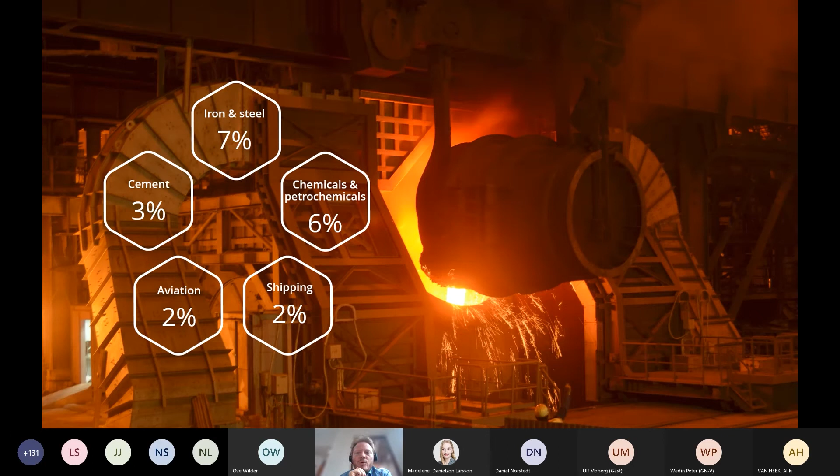So we really believe that where Topsoe can play a role and where electrolysis and hydrogen and downstream products is critical is in the hard to abate sectors. So these are sectors such as iron and steel, chemicals and petrochemicals, shipping, aviation, cement. These are sectors that are very difficult to directly electrify. It's a little bit back to the first speaker of the day, where in some of these cases you need very high temperatures. In other cases, you need fuels with high energy density.

If one looks at a schematic here on what needs to happen, what Topsoe traditionally has been doing and what we're also doing today is that on the left you see feedstocks, then you have some sort of conversion technologies, and then you have the way you use them out on the right. What we do today and have done historically is to take fossil resources and convert them into various products that modern society needs, that being fuels and chemicals. And what is happening now is that there's a much increased need to couple both biomass and waste to these end products and electricity to these end products. And what I'll focus on today is the coupling of electricity to

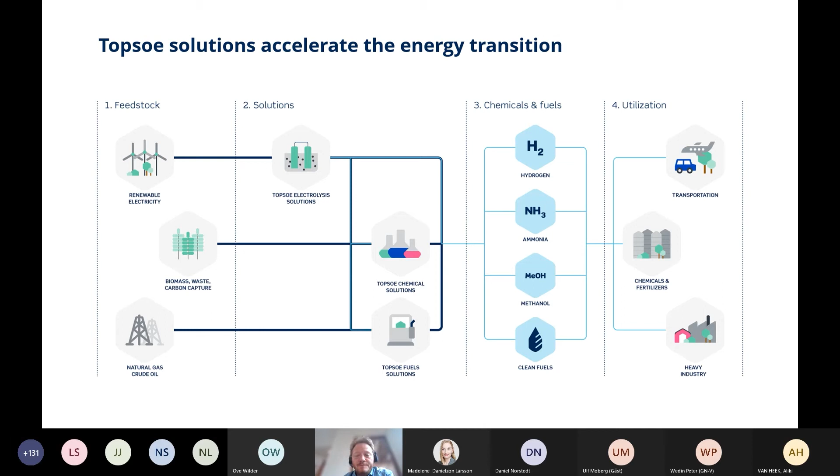So a little bit about electrolysis. The largest efficiency losses when you go from electricity to end products lie in the water electrolysis process itself. That is the process with the lowest efficiencies, and this is an illustration where you can see the energy consumption on the left, when you go from methane to ammonia. Ammonia is just an example here, and you would see more or less the same with other products. The methane to ammonia process is extremely efficient, and you actually cannot beat it if you use low temperature electrolysis technology such as alkaline or PEM. You would end up using more energy, and the majority of it, as you can see here, is on the electrolyzer. The chemical synthesis loop itself doesn't really use much energy.

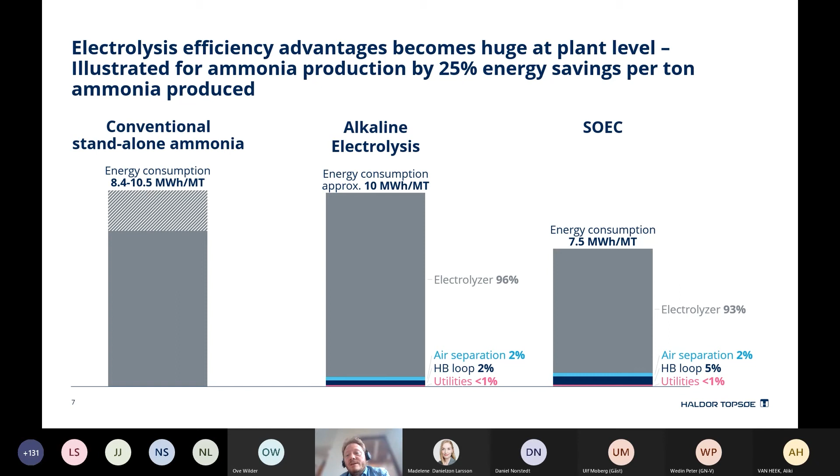And then if you shift from alkaline electrolysis to high temperature electrolysis, which is much more energy efficient, you end up with a 25% energy saving, which of course matters a lot, because one of the bottlenecks in the energy transition is the development of electricity sources required to substitute fossil resources, because we get an immense amount of energy from fossil resources today.

And what we have spent time on is optimizing the electrolysis together with the downstream processes to link with fluctuating wind, and it may be one of the benefits of nuclear that you do not have fluctuating production. You would actually prefer to run at stable production. But just to say that we are at a stage where you can accommodate these fluctuations you will see from renewable energy, in this case defined as wind and solar. You can accommodate that in the ammonia synthesis without a need for hydrogen storage.

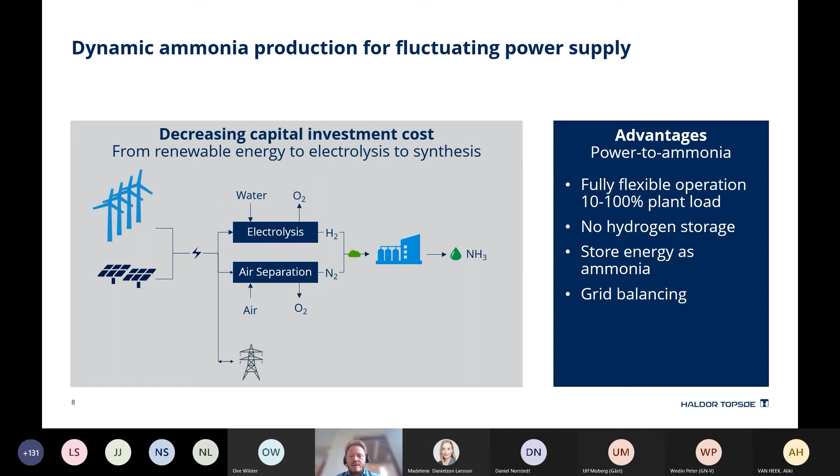So this means that the solutions to integrate with varying amounts of electricity, we are now in the stage where we'll have a 20 megawatt plant demonstrating this in Denmark, up and running in a few years. So this means that we really spend a lot of time on this, how to transform electricity into chemical products. And this is of course where the interesting topic lies, what is possible when you have nuclear.

And now I'm going to spend some time on high temperature electrolysis, because what you can do when you have high temperature electrolysis is that you can benefit from having a heat source to provide steam, and you cannot have this benefit if you do low temperature electrolysis. So you can do heat integration. So it means that you have two variables to play with when you integrate with nuclear. While if you had alkaline, if you had low temperature electrolysis, you can just use electricity. You have no use of the heat for the hydrogen generation itself.

So high temperature electrolysis, for those of you who do not know, this is the crash course. High temperature electrolysis is an electrolysis technology that uses a ceramic membrane that can conduct oxygen ions, and it can only conduct oxygen ions at high temperature. So you need to run these solutions at high temperature. The way we do it, it's between 700 and 800 degrees C. And that has some benefits, not only because the higher temperature gives you better kinetics, it also gives you some benefits in terms of efficiency due to some thermodynamic arguments.

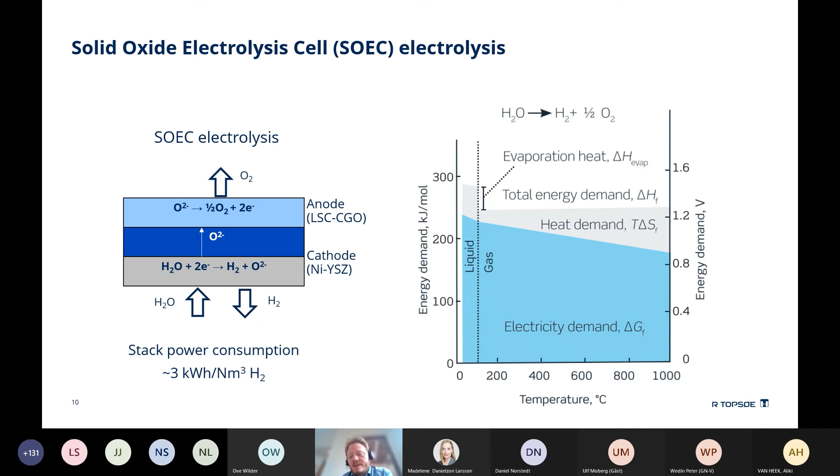So this is the main reason why you have very high efficiency. I mean 100%, that's as far as you can get, so you cannot get higher efficiency than this. And then of course in choice of electrolysis technologies, you have 3 different choices essentially. You have alkaline electrolysis, which is a very mature technology. It has actually been used to build very large industrial plants producing ammonia.

Then you have PEM electrolysis, which is another kind of membrane where you have very fast response, but again you lose efficiency. While then for high temperature electrolysis, you can have high current density. Depends on what you mean by high, but in terms of current densities, you lie in between alkaline and PEM, but you have high efficiency.

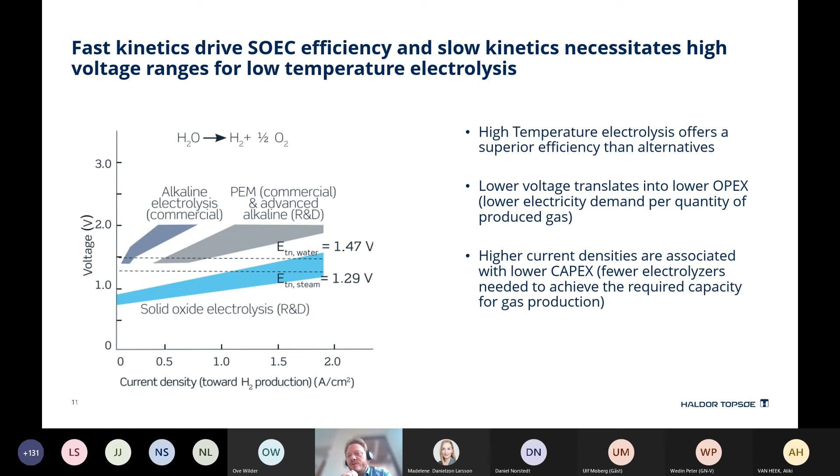So for these kind of applications in large-scale conversion of electricity into chemical products, efficiency will be critical. Efficiency is critical in the fossil industry, turning fossil resources into whatever product you need, and there's no reason not to believe that efficiency will also be critical in the future, where you have substituted fossil resources with electricity.

Let me just have a look at the time here. Okay.

So if you just want some numbers on efficiency, alkaline and PEM electrolysis have more or less the same efficiencies. They operate in different ways, but efficiency-wise, it's more or less the same. So you have some losses. This is kilowatt hours per normal cubic meter. So you have some losses in the plant, and then you have losses in the electrolyzer itself, and then you need to pay the heat of evaporation because you go from liquid water to a gaseous phase. So you need to pay that anyway. So that is added here.

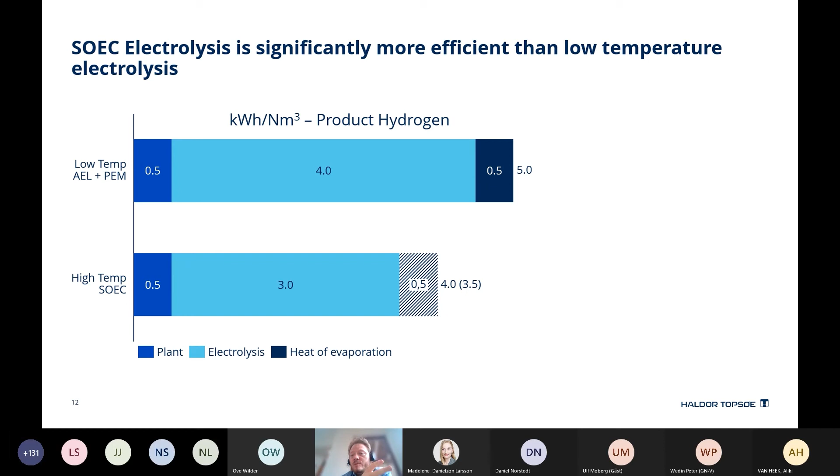When you have high temperature electrolysis, you still have losses in the plant. Then you have the stack efficiency, which is a thermodynamic limit, and then you also need to pay the heat of evaporation, but in this case, you actually do feed steam to the electrolyzer. And of course, this heat of evaporation, you can provide with electricity, but it can also come from processes either in front of the electrolyzer, so that could be a nuclear plant, or from conversion processes downstream.

And as I said already previously, in the last 10 years we have done demonstrations on integration of high temperature electrolysis with synthesis of methane, methanol, ammonia, so traditional chemicals that are produced in very large numbers and are needed for our modern society. You have these benefits of heat integration when you look at these different synthesis processes.

So it means when you think in terms of nuclear integration, it may not be that your product would be hydrogen. It may be more beneficial to have a product which could be ammonia, or a fuel or another chemical. It depends, of course, on where this nuclear plant is located and the local market. But not necessarily that you have to think in terms of hydrogen as the end product. I would say in our discussions with the various project developers and commercial entities, it's very much fuels and chemicals that are the needed end product and not hydrogen itself.

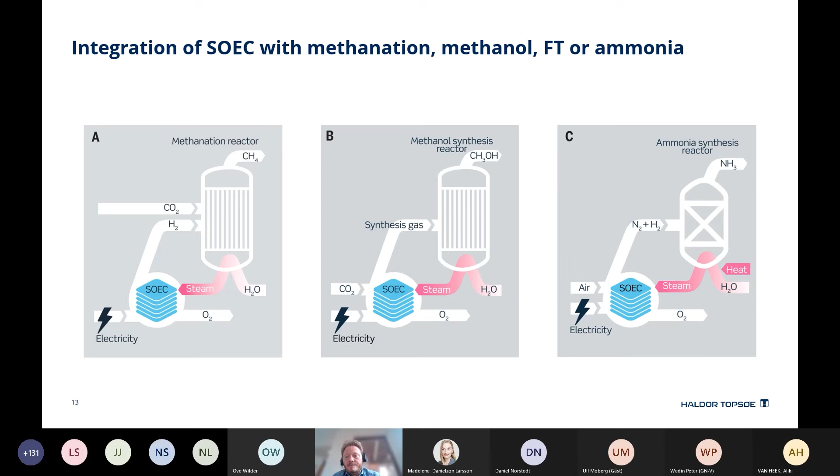So a little bit about where we are coming from. Topsoe had a daughter company where we tried to make fuel cells based on high temperature cells. That was not a success. Many other companies tried to do the same, but essentially got outcompeted by efficiency in gas turbines and of course by wind and solar. So we took this in 2013 and used it for applications in small scale chemicals where you take CO2 and you convert it into CO.

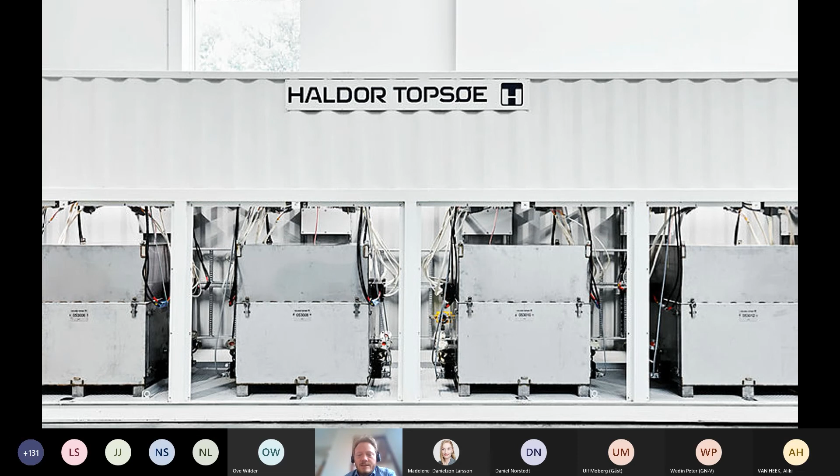This is the product for that market. The product that will be integrated with nuclear plants or with solar and wind will look completely different. You essentially scale this up. So each repeating unit, these boxes you see, will have an output that is more or less 10 times what we have in this product here for it to make sense. This is just to show that there's actually something that is materialized in the real world.

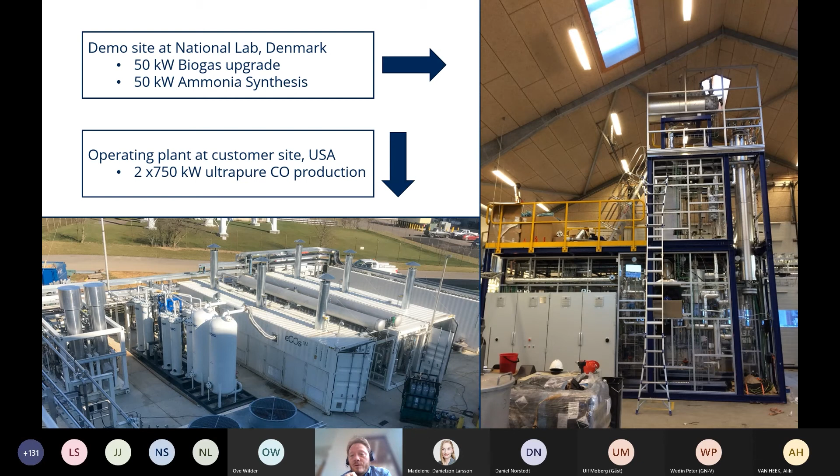So, with essentially more or less the same ideas as for the small modular reactors, you can manufacture these repeatable units and get the benefits of economies of scale, and that is key to bringing down the cost of electrolysis. So you have to think in terms of modular units that have, of course, different utilities, and which look like the chemical industry. It will feel like operating not exactly a nuclear plant, but the process control is similar to the chemical industry.

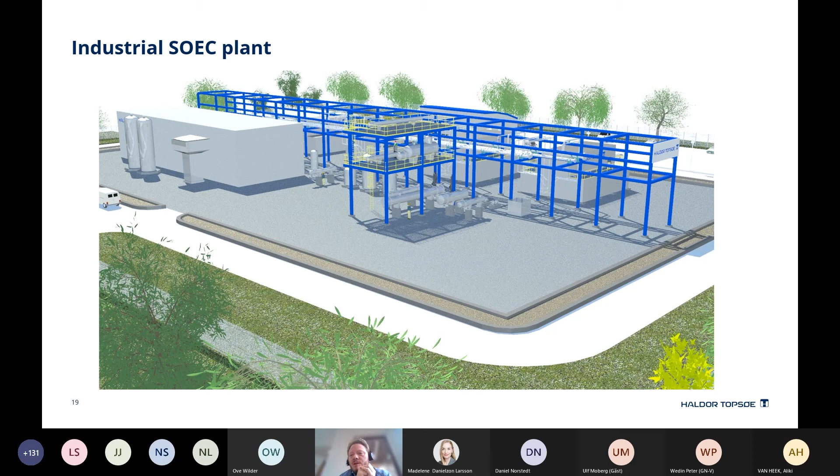And then I want to end on this slide here, because I think this is where there's some work to be done. So you can say the high efficiency from high temperature electrolysis comes from two things. It comes from the fact that the stack itself is highly efficient, and then the last gains come from the way you integrate high temperature electrolysis with the processes around.

But maybe the steam that you would have available from nuclear would be of higher grade, and you would not have value in using it for other uses. You would rather use it directly in your electrolyzer. In that case, it would require some engineering to find the optimal solution.

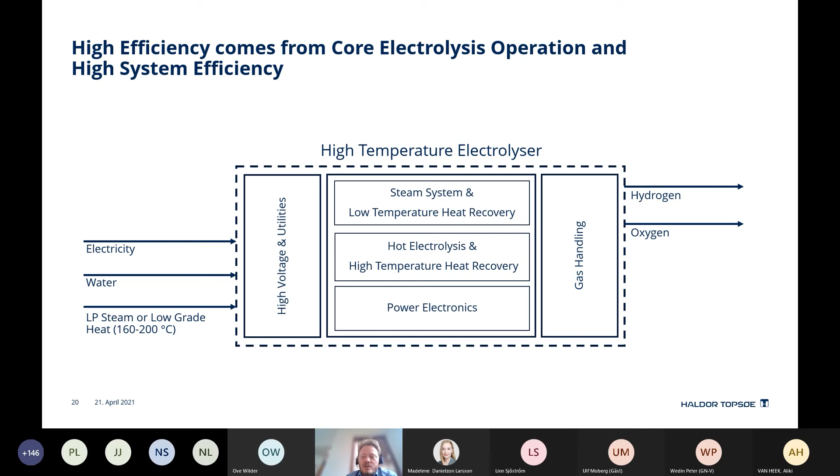So I will essentially stop here by saying that high temperature electrolysis has a lot of advantages which we believe fit very well with the nuclear industry and hard to abate sectors as such. Essentially, this fact that you have high efficiency and you have this benefit of integration both with downstream and upstream heat sources, which we believe makes it very suitable for integration with nuclear.

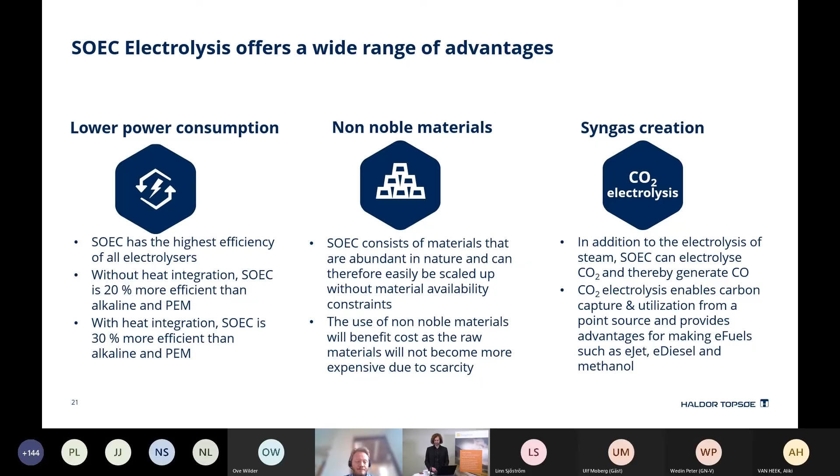So I'd like to maybe split my questions in two categories. First, starting with a more general view on hydrogen, taking the opportunity to have somebody like you who obviously knows the hydrogen landscape quite well, and then from there move to the specific application around high temperature and the integration of nuclear. So if we start with the hydrogen landscape and the progress around electrolysis, can you give us an idea how quickly that development is going right now and what we can expect in terms of cost and performance of electrolysis more generally?

Yes. I would say this area exploded in 2019. As for nuclear, it requires some government incentives to drive this industry, and those government incentives came in 2019. So you had the political winds change, especially in Europe, and then later maybe 2021, 2022 also in the US. And this means that if you look at the landscape of electrolysis companies, you have established players in all of these three technologies who are rapidly scaling up, establishing production capabilities in 500 megawatt plus sizes.

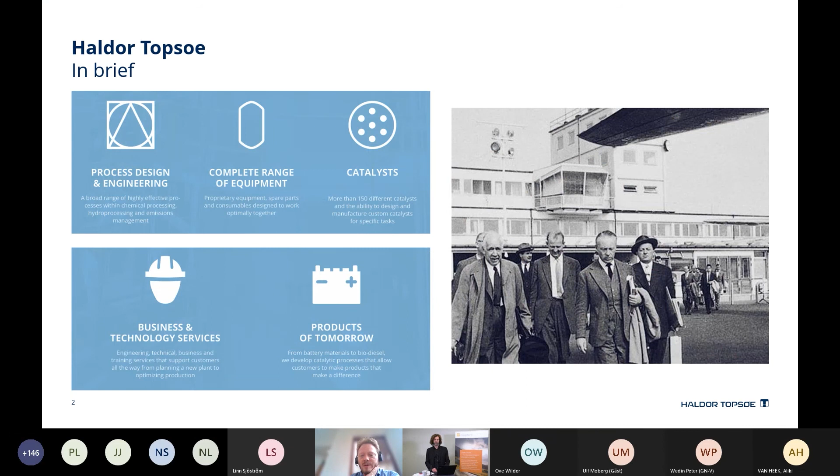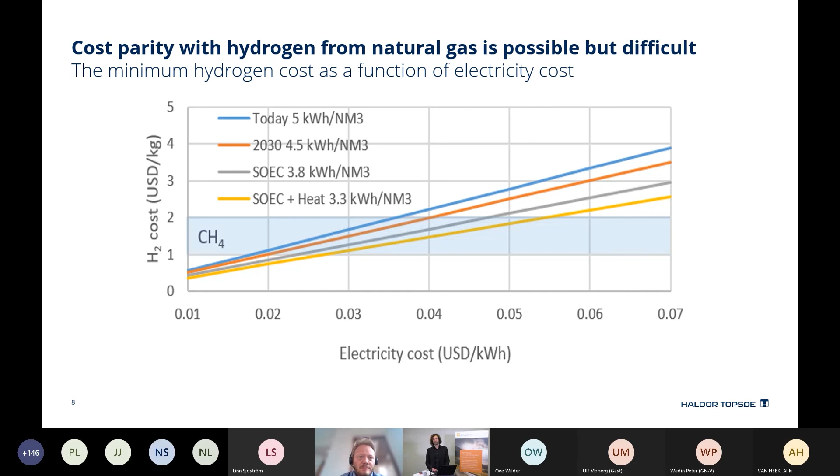Yes. But then moving on to the issue of high temperature electrolysis that you talked about. You mentioned quite a few benefits, including the higher efficiency and so forth. It seems obvious. Why is this not happening then? Yeah. So for two reasons, it's the least mature technology.

There was a lot of both R&D activities and also commercial activities in applying these solutions for fuel cells from 2000 to the next 10 years. So the technology matured in that area, but just 4 or 5 years ago, it was impossible to make a business case for making hydrogen. So that's why we focused on the CO2 to CO, where you actually can have a competitive solution on commercial terms.

So the short answer to your question is that hydrogen electrolysis is lower on the development curve, and what is needed to bring it to be relevant for industrial applications is to produce it in industrial plants, and that is what we are doing for hydrogen electrolysis, and also some of our competitors are doing. And that will bring down the cost to a level where those assumptions I just talked about on the previous slide actually make sense. So your capital cost do not dominate your levelized cost of hydrogen.